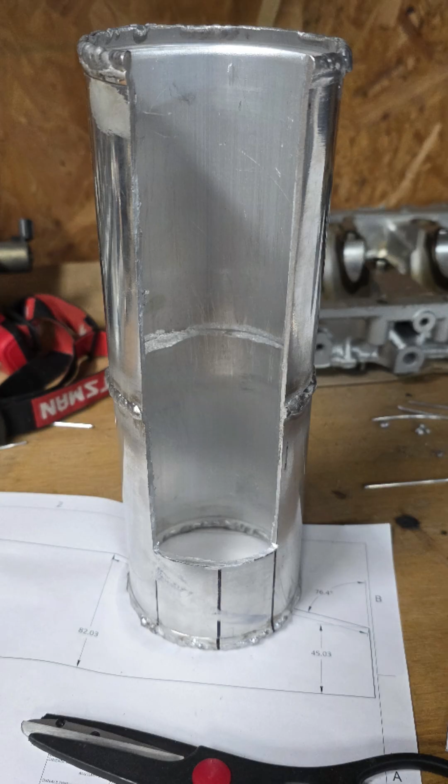So this is the intake manifold. Well, this isn't, but this right here is the intake manifold that I'm making for my K24. Got some mail on top of my engine block.

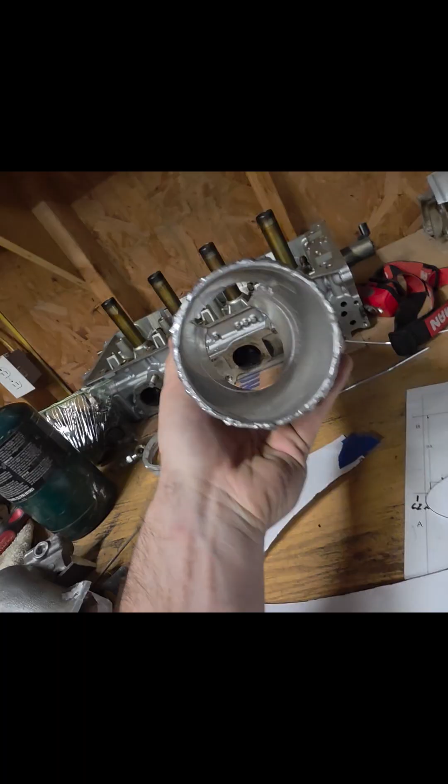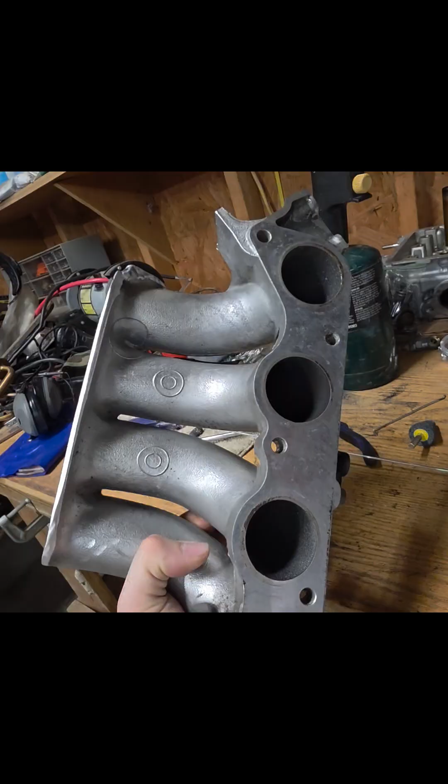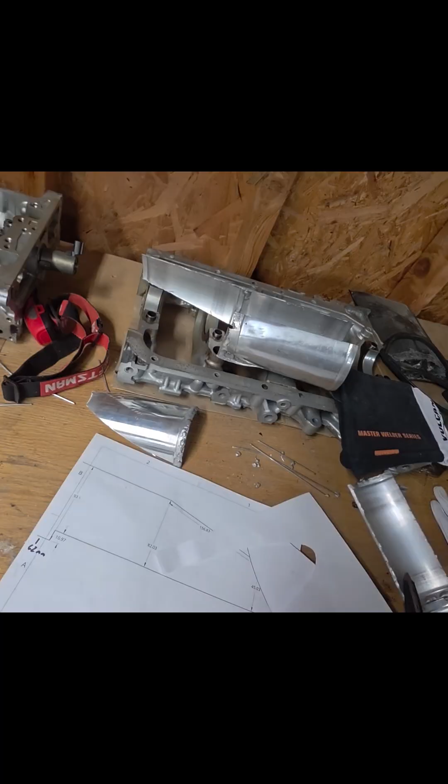So it started out as 92, 93 millimeter aluminum intercooler tubing and the OEM intake manifold, which I chopped up into this. This is just a PPA manifold. It came off the Eco model of the K24. It's a Japanese engine, JDM engine, but it's just a standard Eco K24.

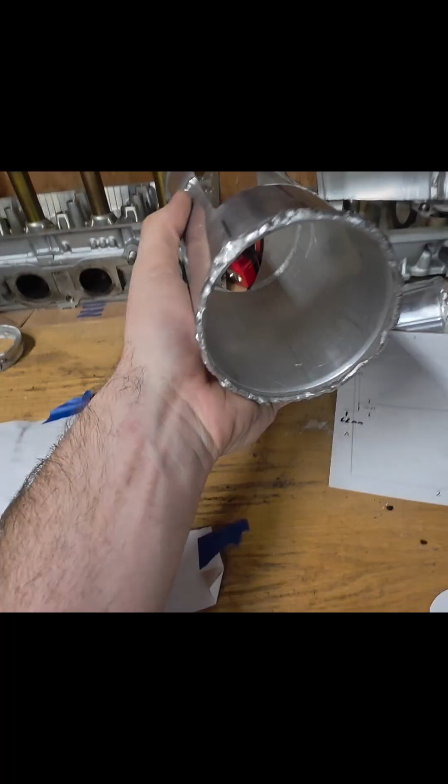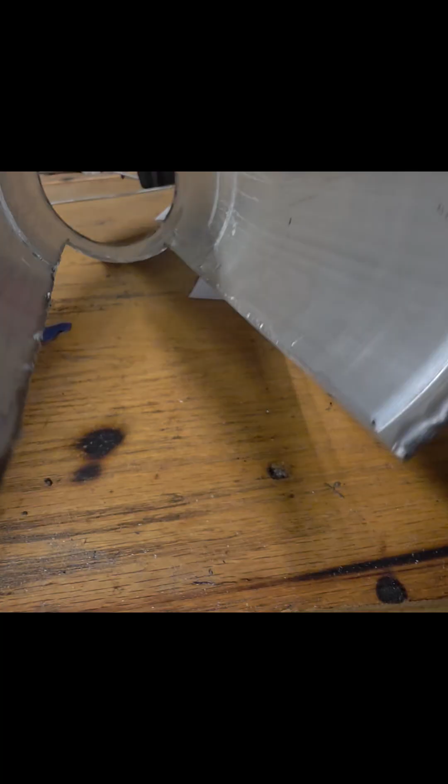So I've been cutting this to shape. I had to weld it. It started out as 2 tubes. You can see my relatively nice aluminum welds. They did penetrate decently.

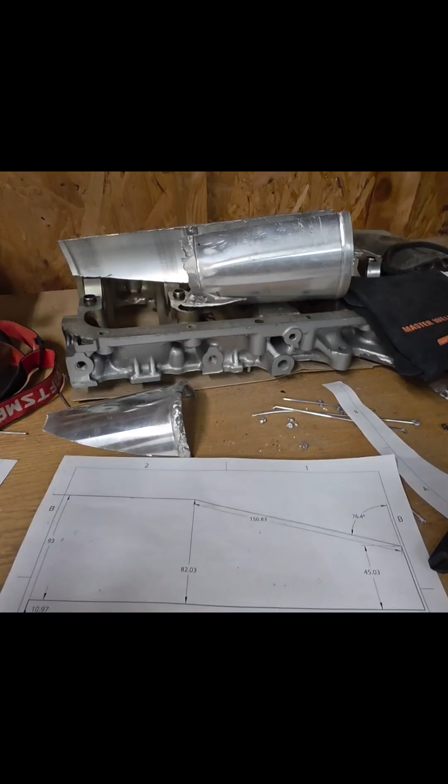And then I cut it at the bottom here, and this is going to be super hard to film, so that it will slot onto this, and I'm going to have to weld a little piece here. Might be able to use some of these scraps. As you can see, there was a past attempt, but we don't talk about that.

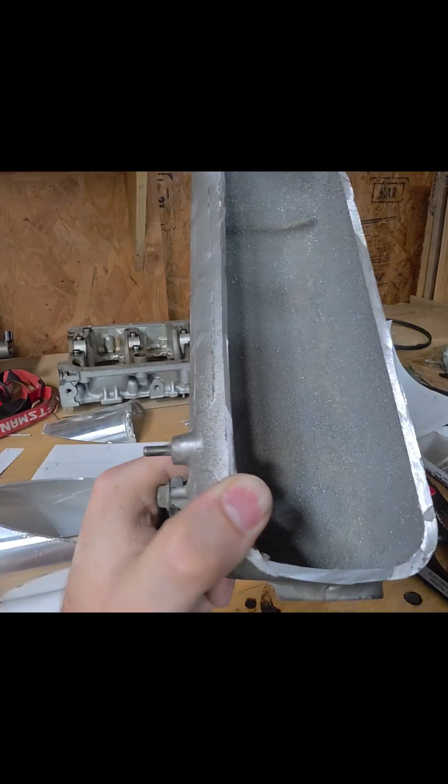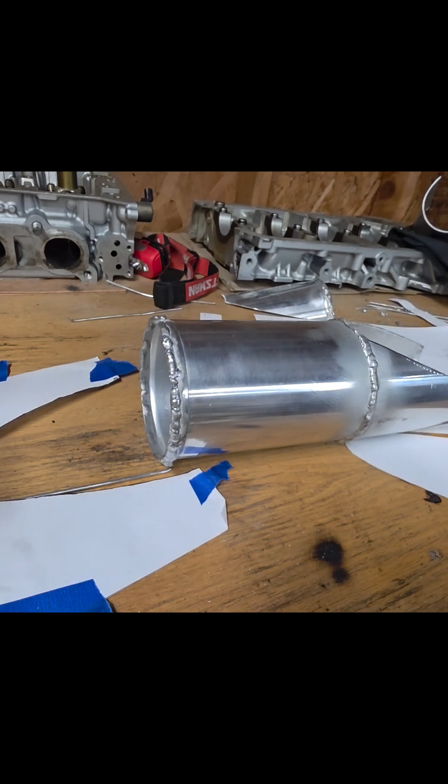So I just cut this part because this is loosely based off the Skunk2 Ultra. So it's a log manifold, but unlike the OEM manifold, which is just a tube basically, this one tapers at an angle and it forces airflow, in theory. I mean, I say in theory. The real ones do it. I don't know if mine's going to do it super well, but the real ones, it allows them to create more air pressure on these rear 2 cylinders.

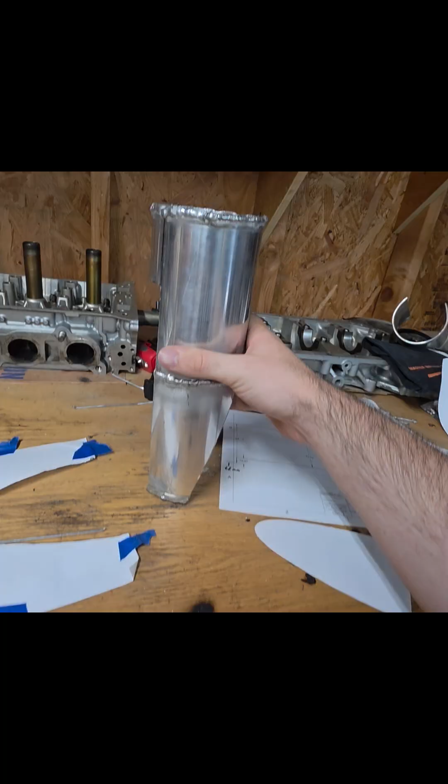I just kind of copied the design. It is not one-to-one. The real manifold, I think, is longer and also a little bit bigger in diameter, and I think it tapers from like here to here. I didn't want to do that because if you do that, you decrease your capacity. So this will have, when it's all fully welded, slightly larger capacity than this manifold.

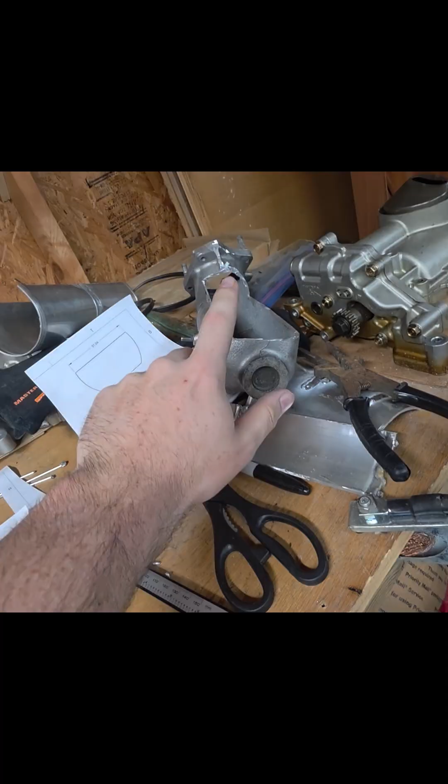If we just put them side by side, that's roughly how much capacity is there. Let's see if I can get a good shot. You can kind of see this one's going to be quite a bit bigger. This is, I think, roughly a 1 liter. This is probably going to be closer to a 1.5. I was hoping to get it close to a 2, like a 1.8 or something, but I don't know if it's going to be quite that much.

But anyways, I kind of copied the design, except I didn't copy it exactly. I made it start tapering halfway, and I think I also made it taper to not as far down, whatever the word is for that.

I didn't put the dimensions on this piece, but I designed it in CAD. I modeled it in CAD, and then I print out these pieces to help me cut it out. So that's what I've been doing here.

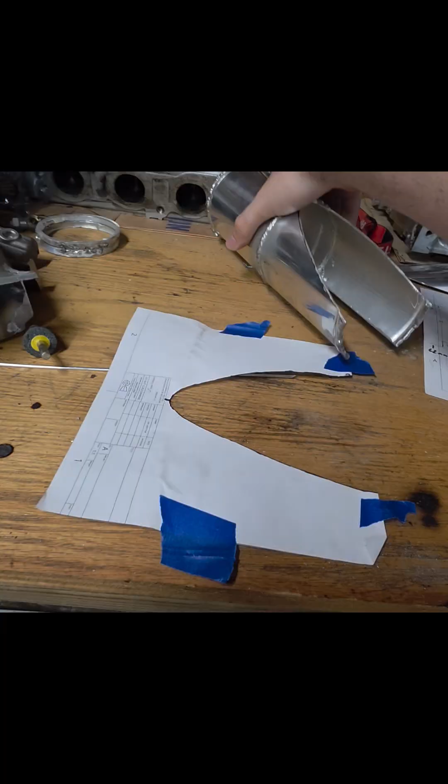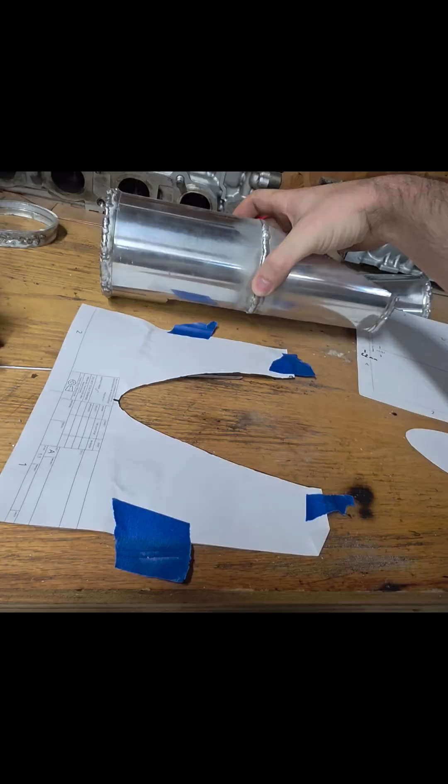Sorry for the abysmal camera work. I cut out this piece here. The bottom, I used my drawings as templates and just kind of eyeballed it. I mean, I did measure, of course, but just used my drawings and some basic measurements to get the right angle. But yeah, so I just cut this piece out, as you can see.

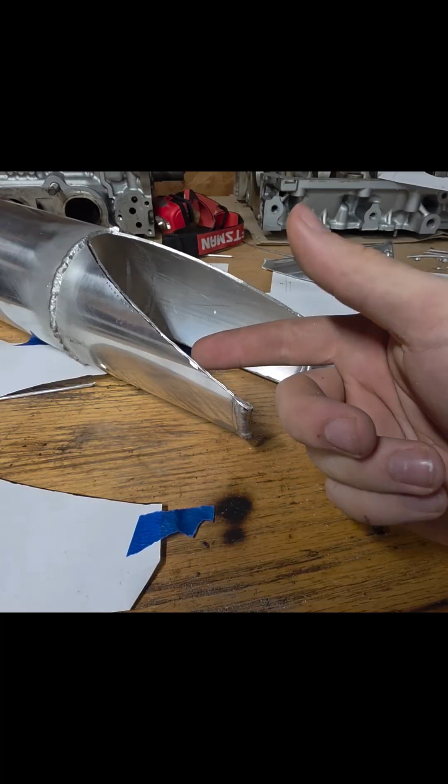And this is the template for the plug that's going to have to go here. Unfortunately, I'm not entirely sure how, but I think it has to do with how cylinders are modeled in CAD. This is like when you cut a cylinder on a plane. So this is a plane, you see how it's flat. Well, when you cut a cylinder like that, because the cylinder is a curve, it leaves these impossibly sharp edges, but they don't show up super well in CAD unless you really zoom in on them.

So it fits pretty well. Hard to see, it fits pretty well, but as you can see towards the end, there is space. So when I cut out my blank out of some aluminum sheet, I'm going to have to make it probably 2 or 3 millimeters wider on the very ends, and probably like a millimeter longer, because I put some welds on the ends of this to reinforce it. Kind of unnecessary in hindsight.

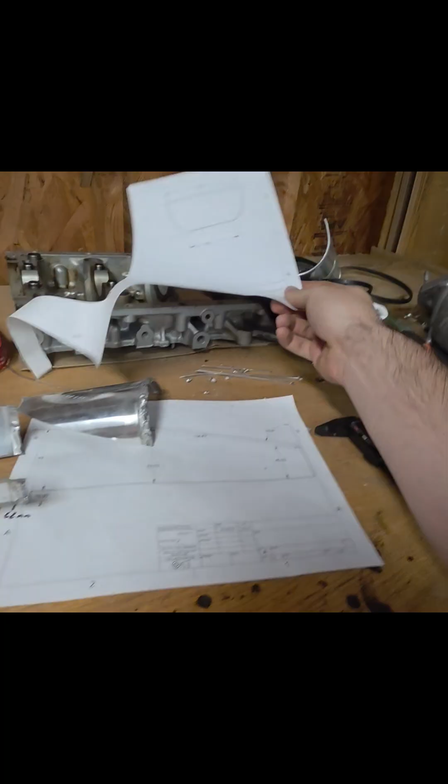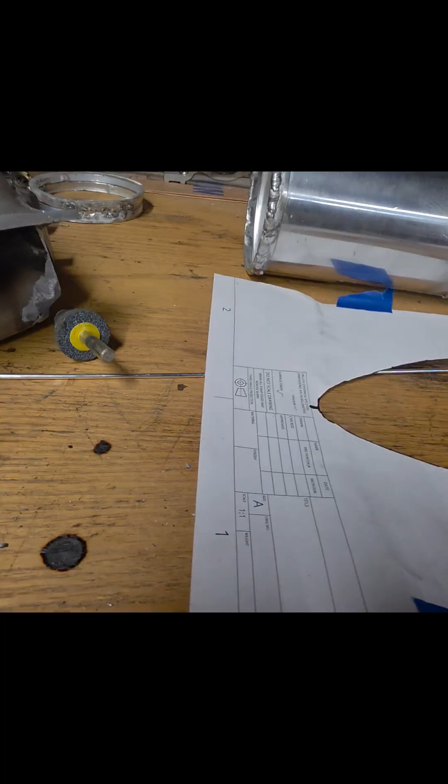It was also partly me practicing, because I am a certified welder, but I haven't welded aluminum in like 2 years. I've never welded aluminum pipe. This is my first time welding aluminum pipe, but this was a crapshoot. You can see I had to grind down all my welds, and they weren't very good, but I used this outer rim as a test zone, so you can see mixed results. It does benefit in some ways because it beefs this area up, which means I should be able to get better penetration welds. Not that it really matters, because it's an intake manifold, but it kind of matters.

I will eventually put boost on it, so there'll be some pressure, but it's getting close to being done.

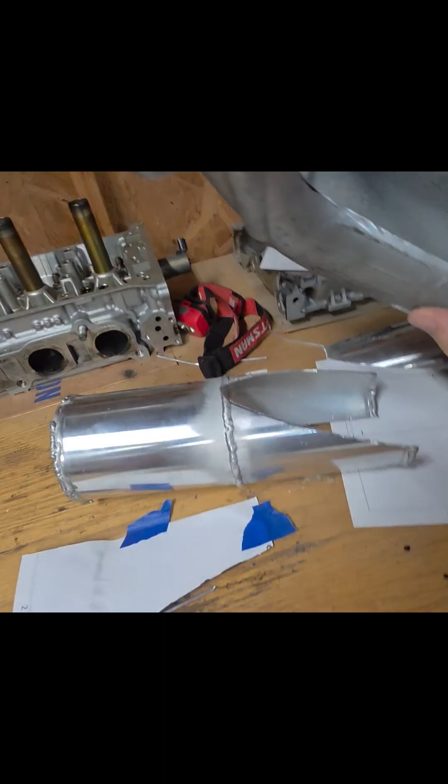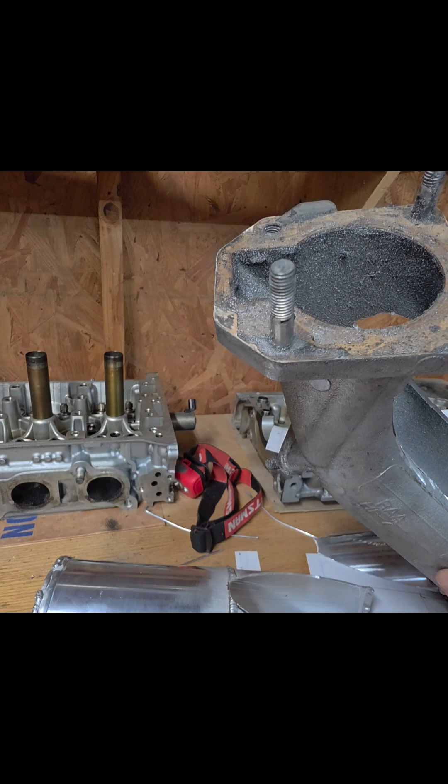I tried to take as much off this old crappy intake as possible. I might end up stealing this plate, I don't know. I bought some aluminum plate to use, but I'm kind of thinking about it, because that would be a nice template to build off of. I don't know, still thinking about it. It's pretty thick, pretty sturdy, but let's see if I can get a shot.

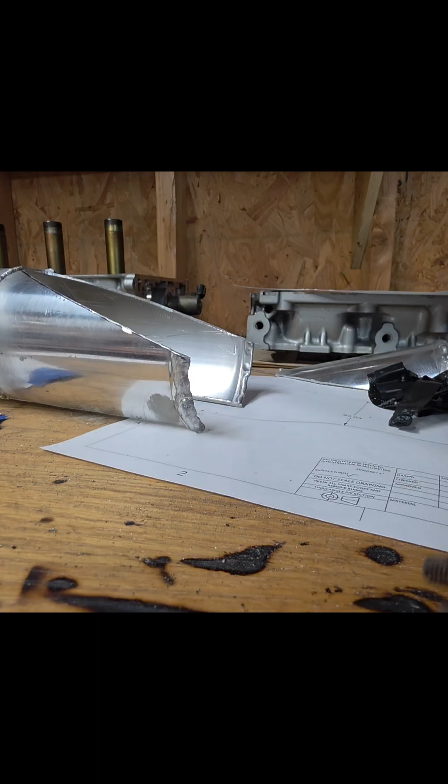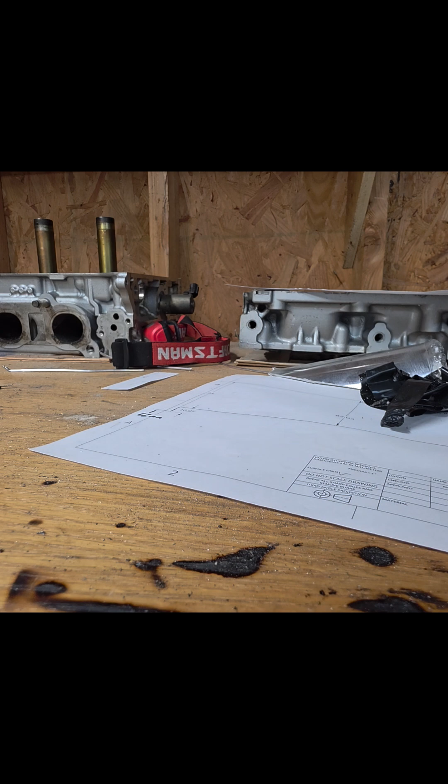I don't have a proper camera setup, I'm literally just using my phone, but I'm going to see if I can replicate decently well what it'll roughly look like once it's been welded onto the headers. I think that's the right term, right? Headers, intake headers, man, it's the dang tubes that run to my intake. Whatever you want to call it. Let's see. Oh, this is going to be hard to do. Well, maybe not.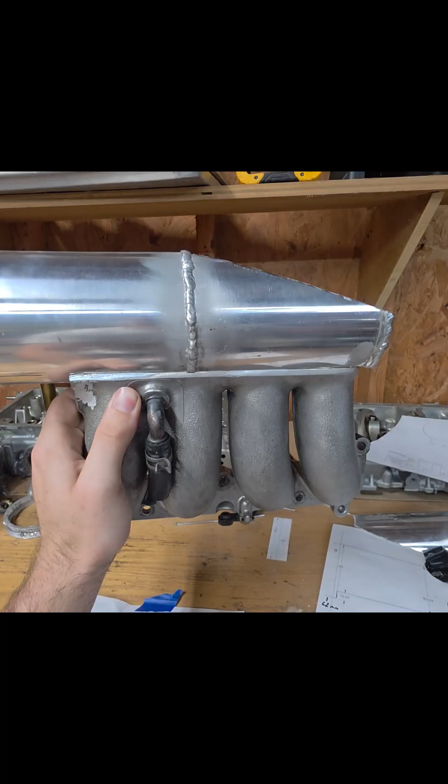So when it's done, it'll look something roughly like that. Of course, I'll have to weld up this little gap down there, and weld up those sides. But yeah, it'll look something roughly like that.

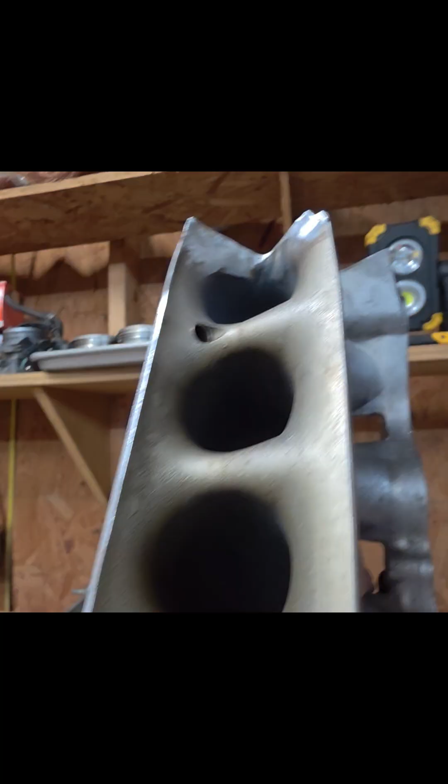I may also, I've kind of been researching it, but I've been holding off on it. I might also polish these, port polish, whatever you call it.

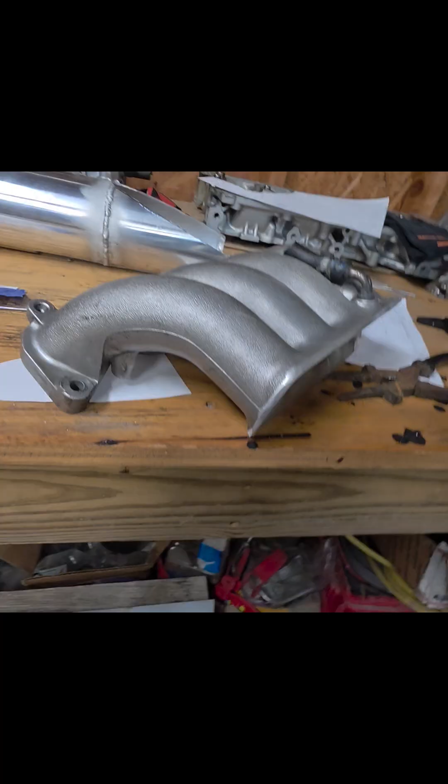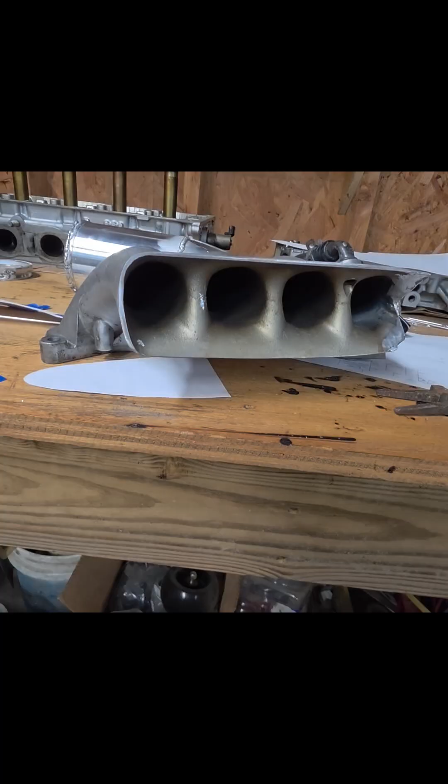I did clean them out, because anybody who's ever worked on an eco engine, especially one of these 4-cylinders like a Honda or a Toyota 4-cylinder, knows that these intakes are super freaking dirty. As you can see, I think that's the intake side, because they recirculate some of the exhaust, and then also the exhaust timing is reduced, so it ends up having to keep the carbon in the intake longer, and it makes it look poo-poo. So I cleaned that out, and a couple other things.

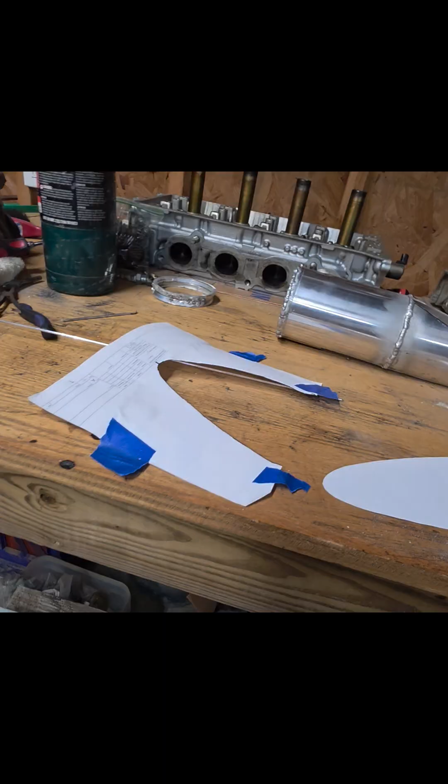But yeah, besides the initial screw up, which wasted about 20 bucks and probably 5-7 hours of my time, it's been going pretty good. Definitely design things in CAD, guys. That's actually probably the number one reason why I messed that one up, which is a blessing because the welds on it look like trash. But I just tried eyeballing it and measuring things out and coming up with stuff on the fly. Didn't even draw it.

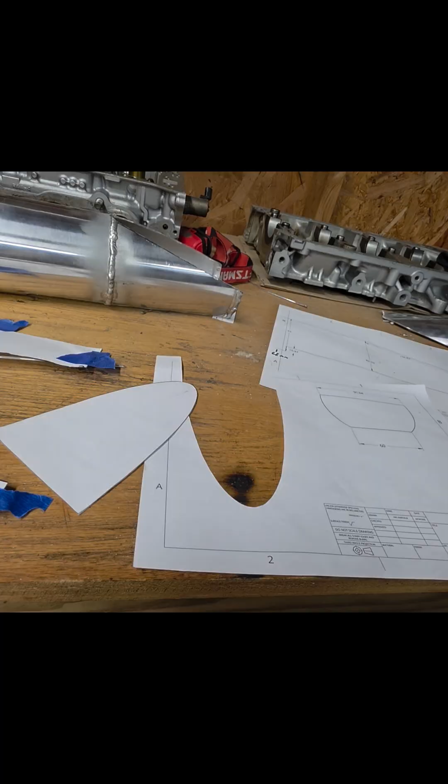CAD is so easy, use Onshape, use whatever. If you're going to engineering school, go to your computer lab and use your school's engineering program. But use CAD, guys, it's amazing, it's awesome. And make templates, these are awesome as well. Of course I have to change them a little bit, but that's okay. It's better than trying to figure it out myself.

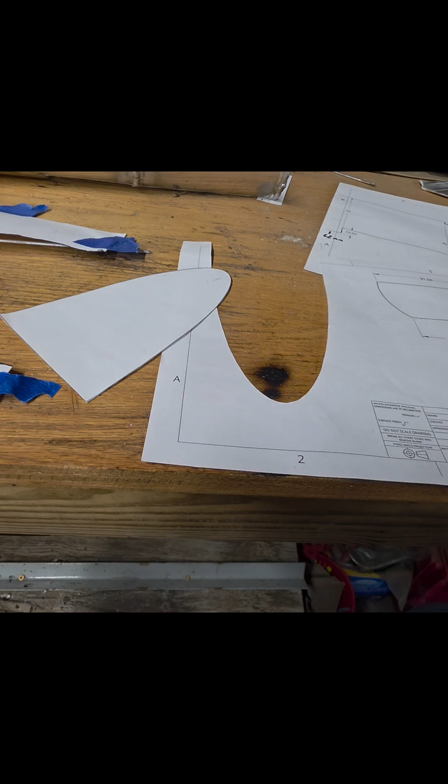And yeah, so that's the intake manifold. Like I said, not done yet, not even close, but definitely making progress.

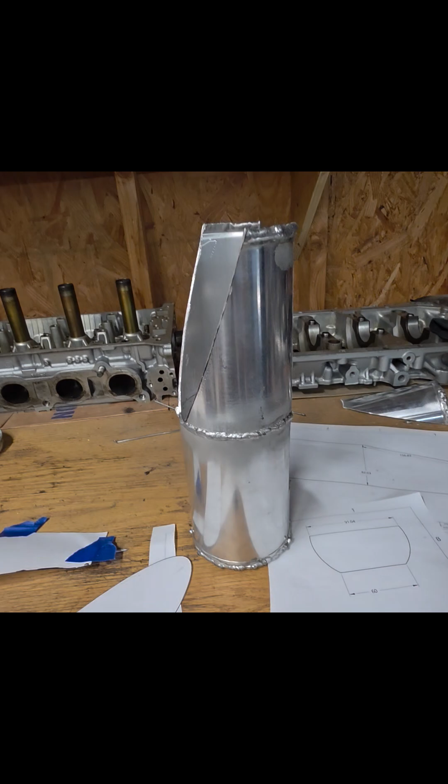As for, I guess, briefly going over costs and stuff. So I think the Skunk2 manifolds, if I remember right, if you buy an official Skunk2, Ultra, Street, whatever, there's like 5 billion different versions, they're all the same thing. But they're like $250, $300, pretty expensive. And they're typically on back order as well.

That nice weld. Oh yeah. Oh yeah.

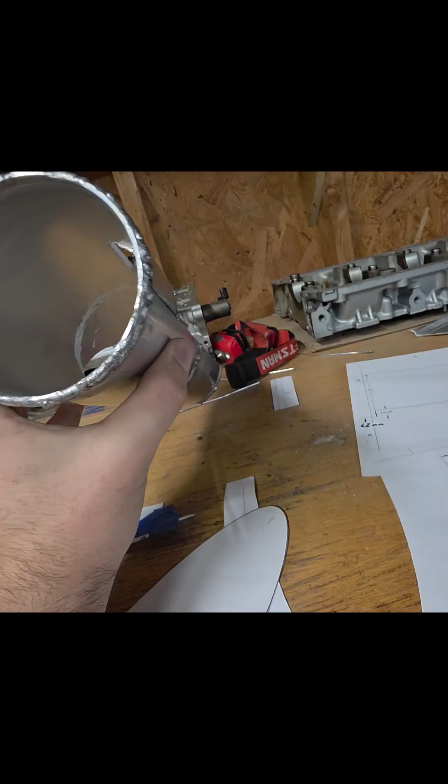So if you buy one from Skunk, that's how much they are. You can go on eBay and buy basically factory rejects from the factory that makes the Skunk ones, the ones that didn't pass QC, and they're like 150 bucks. Some people have had pretty good success with them. I mean, at the end of the day, an intake's an intake, you know, does it bring air in? But they do have quality control issues, especially with finish. They're all cast, so they have pitting and stuff like that.

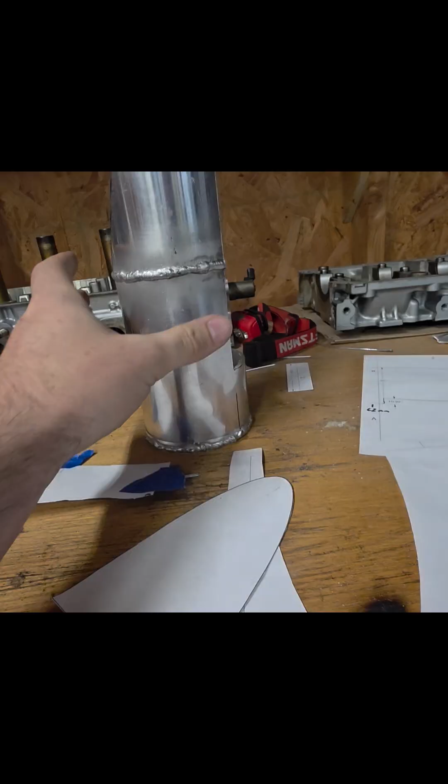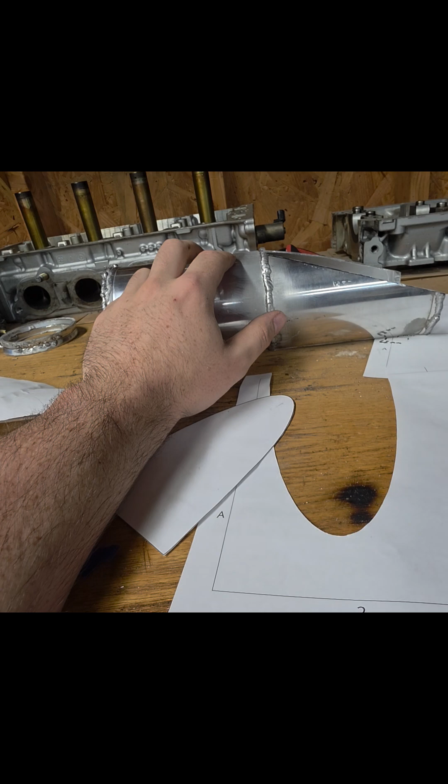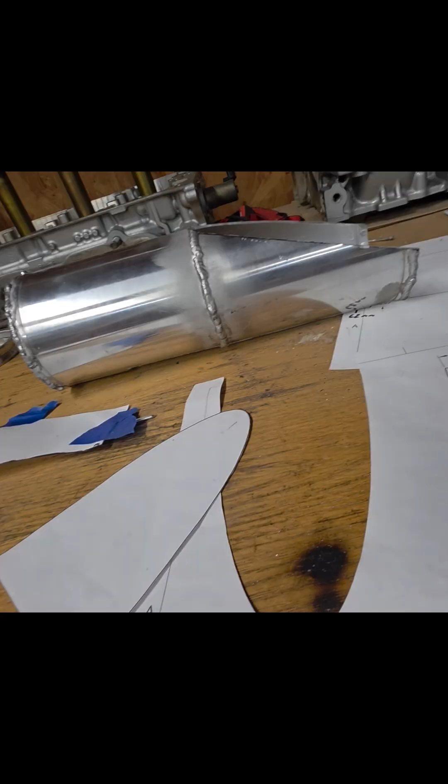So I think so far, if you exclude the screw up, which I am because that's not fair, I think it's $20 for the tube, and then I paid another $20 or $30 for the aluminum plating I bought. We'll just round up and say $30 for the plating, $20 for the tube, so like 50 bucks so far. And then I had to go out and buy a pack of these electrodes, so I guess we can count that. So less than $100 for an intake so far.

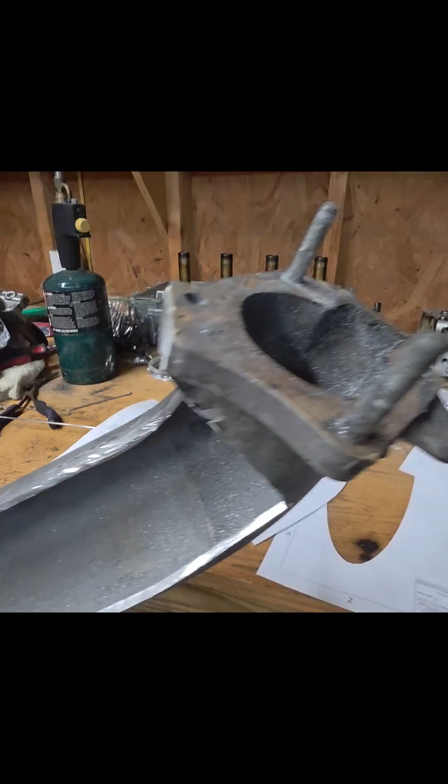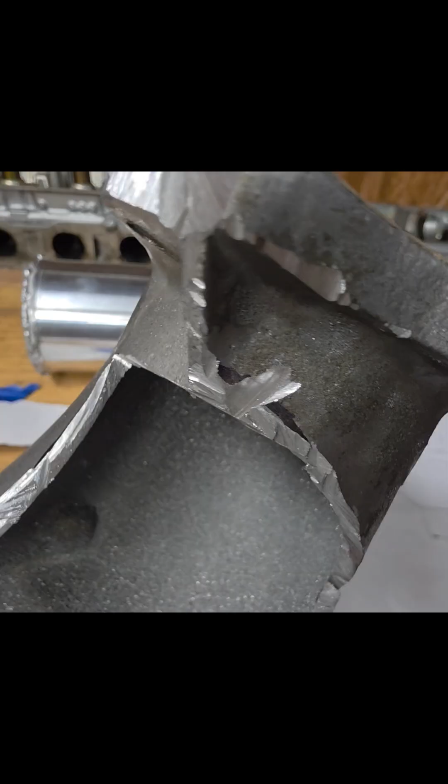Most of it's just reusing the stuff that already came on the thing. I just cut it off. Pain in the butt, by the way, trying to get up in here and cut that.

So that sucks, but you can reuse a lot of parts off the stock intake. Obviously these runners, headers, whatever you want to call them, definitely reuse those, unless you've got better ones you're going to use for some reason. I did a little bit of research, not a whole lot, didn't measure it myself, but I did some research.

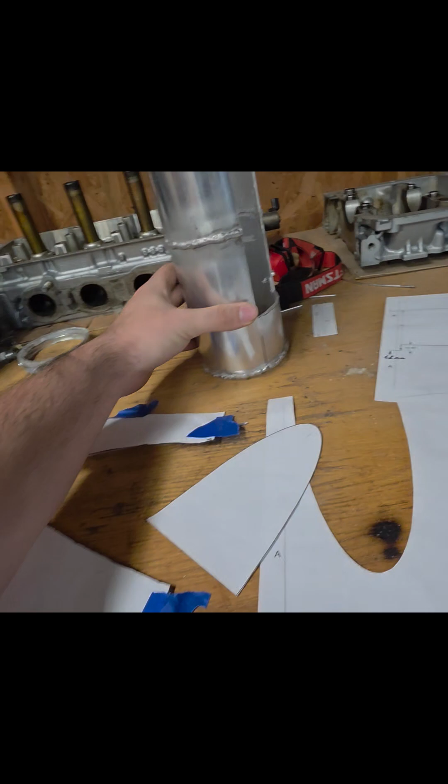The RBC headers, or intake, the actual headers, the tubes, these little runners that go to your intake side of your head on your engine, they're like the same size. The only real difference on the RBC intakes, which by the way cost almost as much as the Skunk2 Ultra intakes, or at least this part of the intake—I don't know, maybe the runners are separate—but the only real difference between them is the plenum, this piece, and the throttle body. These are like the same size.

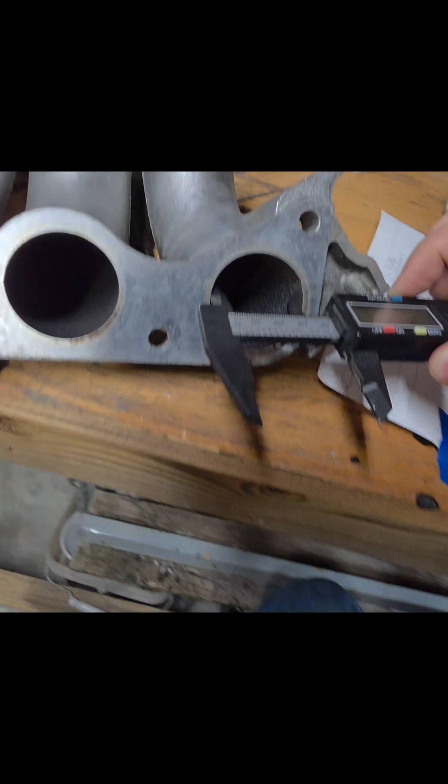I think—how big are these actually? Yeah, these are 41 millimeters. If I remember correctly, I think the RBC ones were like 43 millimeters. So you're talking about like that much of a difference.

Barely noticeable. They were either 43 or 45, which if it's 45 millimeters, that's a little bit better, but still, you're talking about like, you know, what, 2 millimeters on both sides? That's not a whole lot.

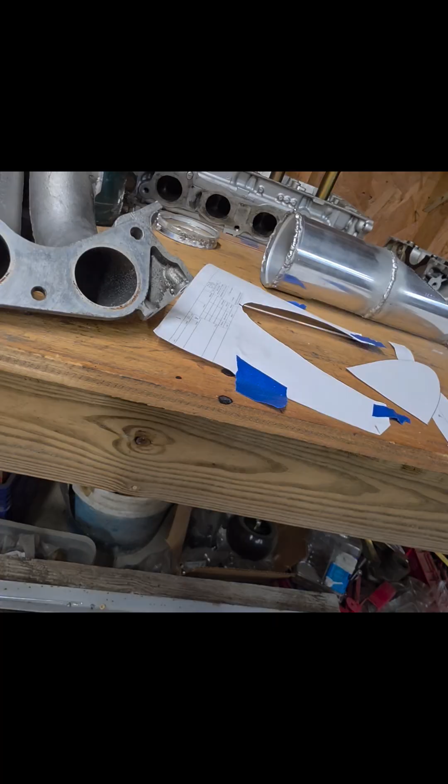So I saw that and I was like, well, the tubes, the runners are not the biggest restriction on these Honda intakes, which these are super short, by the way—like, these are not very big at all. The biggest limiting factor is the plenum and the throttle body, which is why I'm actually going to put a bigger throttle body on this.

So I was like, well, it doesn't make any sense to spend God knows how much money, or go to a junkyard and still probably spend a ton of money on an RBC header or RBC headers, if they're only going to be like, literally that much—okay, well, that looks really big, hold on, that's not quite 2 millimeters. Only that much difference, roughly, on either side. Like, yeah, 40 here—looks better when I do it like that. Only that much difference on either side.

I don't know, to me that's just not worth the money. Which, if you're running boost—which eventually I will be—it probably matters even less. I could see it mattering if you're NA only, but if you're running boost, I don't think it really matters. So just save yourself the money and either go with the aftermarket, like Skunk, or knockoff, whatever, intakes, or just use your stock headers and make your own.

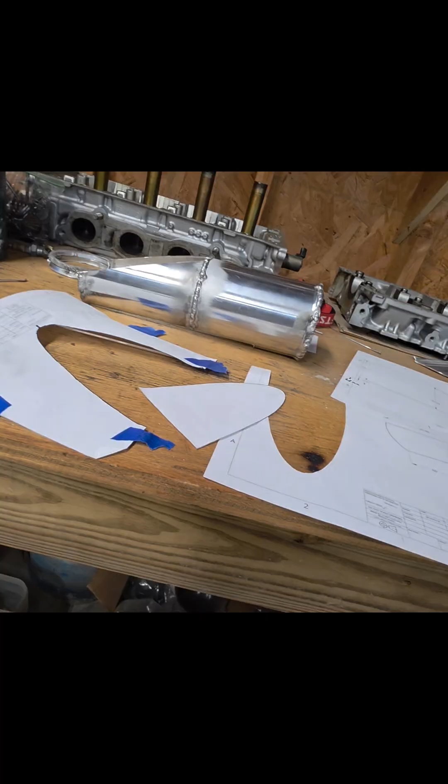So what you save in money, you lose in time. It's not about money—I mean, it's kind of about the money, but it's also just about the love of the game. And I love doing this stuff. I love taking things apart, as you can see,

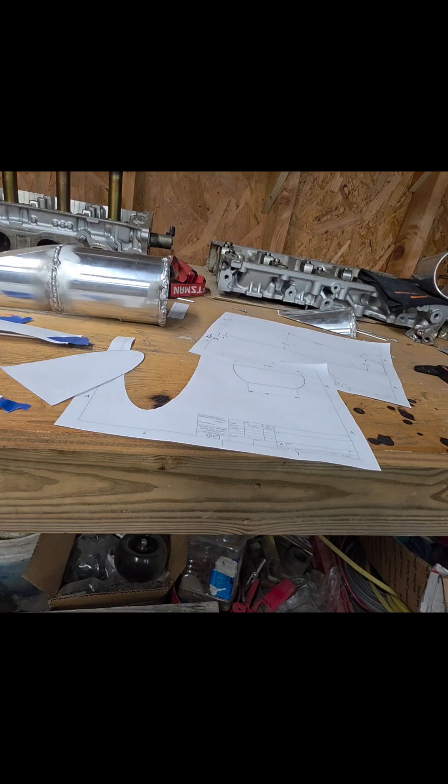and putting them back together and doing cool stuff, doing custom work. I wanted to do something custom to this engine, and this is probably—well, this is definitely the first thing. And it's not about having the fastest car or the best performing setup, because I can guarantee you the Skunk intakes probably perform better than this.

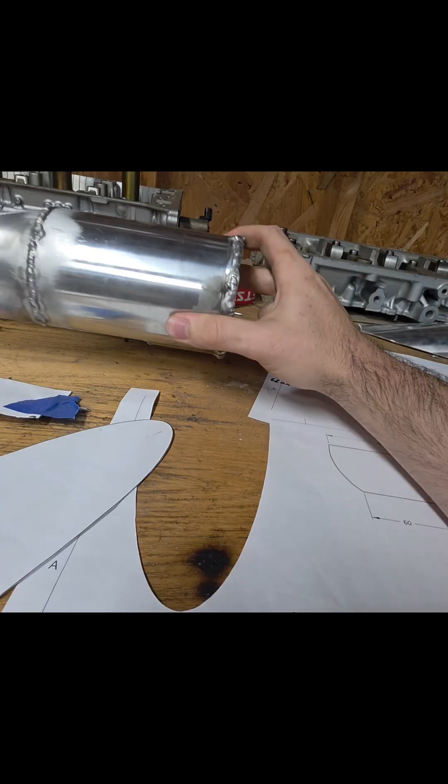It's not even necessarily about saving the most money. I love saving money, don't get me wrong, but it's just about having fun and making cool stuff and having a memory. The nice thing about making things is that not only do you make a memory, but you also make a memorabilia—you're creating something you can look back on and remember in your mind, but you also have a physical product you can see, feel, touch, and show to other people. And that's cool. So, I don't know—go out there and make stuff.